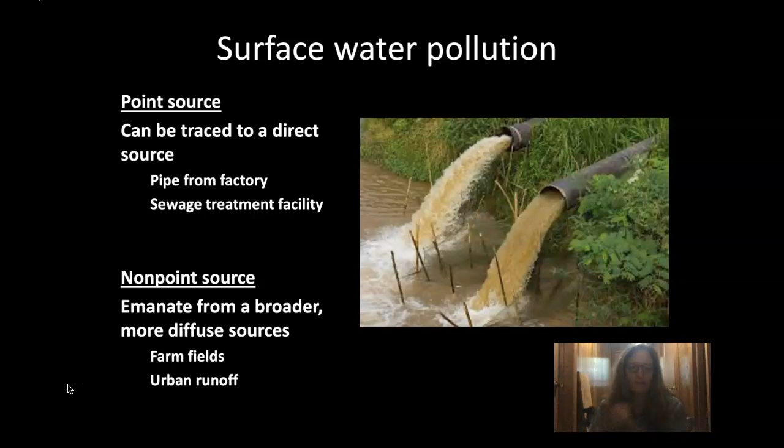A non-point source pollutant or pollution is a little bit more... it's harder to pinpoint the source. It could be a whole town. It could be just farming and agriculture in a community in a watershed. So it's a little bit more of a diffuse source, harder to pinpoint the location. Urban runoff and farm pesticides, insecticides, fertilizer are examples of non-point source pollution.

The Clean Water Act was born the same year I was, and it was put in place to protect mostly rivers, but included other surface waters, smaller streams, lakes, wetlands. It did not protect, at that time in 1972, groundwater. It was just surface water. Then it was kind of vague with respect to what size of the bodies of water it protected.

So the legislature makes the Clean Water Act. Then the judicial branch of the government had to interpret that and make some conclusions, and that didn't always go so well.

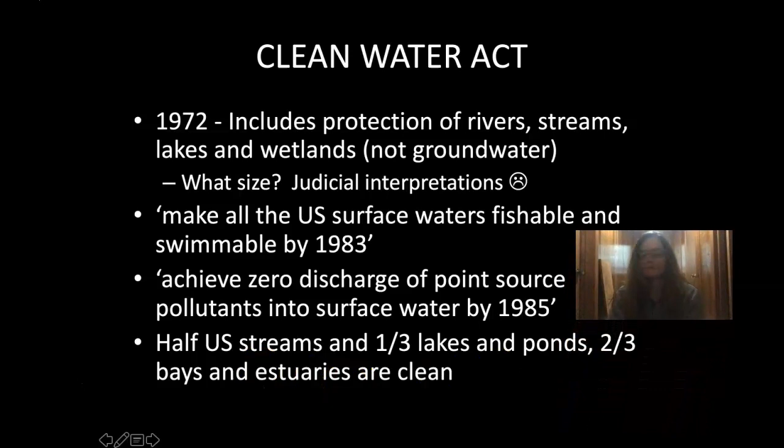The Clean Water Act said that it was going to make all U.S. surface waters fishable and swimmable by 1983, and achieve zero discharge of point source pollutants into surface water by 1985. Let's see, half of U.S. streams and a third of lakes and ponds and 2/3 of bays and estuaries are clean at this point. So it didn't really do exactly what they said it was going to do, but it's a really good start.

So before the Clean Water Act in 1972, I'm going to turn my face off here. Before the Clean Water Act, the streams were polluted so much that they could catch on fire. The most famous or infamous one would be the Cuyahoga River in Ohio, and it would literally catch on fire. The surface would, because of pollutants that were floating on the surface.

The world was polluted with DDT. There's a book, Rachel Carson's Silent Spring, that talks about the effect of DDT and other pesticides on birds, mostly on the viability of the embryos and the eggs, because the eggs would fall apart. We don't use DDT anymore. There was raw sewage, just literally poop, being pumped into streams and out onto beaches. It was pretty disgusting.

The Clean Water Act and then all the amendments added on it in the 80s were mostly controlling those point source pollutions. In order to do point source polluting, you have to have a permit. And with the permits, you can still do this. Basically it allows for pollution within certain limits, limits that would not totally degrade the ecosystem, but you can pollute some these days.

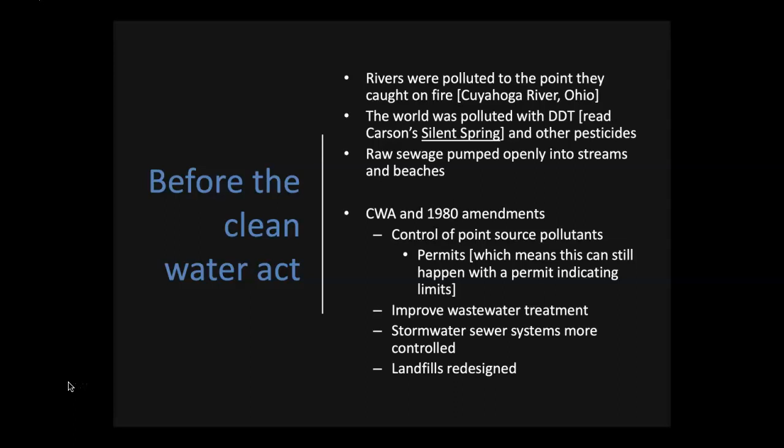Along with the Clean Water Act, there were major improvements with wastewater treatment, major improvements with stormwater and sewer runoff and controlling that, and then major redesigns of landfills. We basically went from open landfills to sanitary landfills where trash is now covered over top with soil and planted with grass, and at the base of it, there's a liner that catches the leachate running through the trash in the landfill.

Non-point source is way more difficult to deal with. We can look at it different ways. There's eroding stream banks, so in that way, soil is the pollution. Soil suspended in the water of a river is not a good thing. And so eroding stream banks, runoff from farms, animal feedlots are really gross. There's lots of poop and mud.

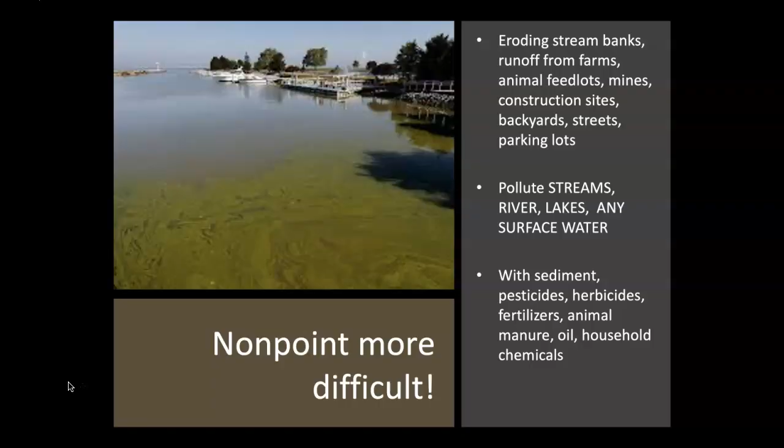How do we manage pollution in surface waters, then? The best thing to do is think about it as individual watersheds, and what are the pressures on an individual watershed. Some watersheds have agriculture, some don't. Some have industry, some don't. Some have neighborhoods, some don't. So it's really individual watershed parameters that will help you think about the best management practice for that watershed.

And then in turn, you'll protect the streams, the ecosystems, and the groundwater supply. So preventing that soil erosion, reducing runoff from agricultural fields, urban areas, and construction sites. Runoff is a big deal. You got to contain that stuff.

Limit the use of pesticides and fertilizers. This includes agriculture, from strawberries to GMO corn. Your lawn, golf courses, all have some kind of fertilizers or pesticides these days, unless they're obviously organically done. But even organic fertilizer is a fertilizer, right? So just containing the runoff is the important part there.

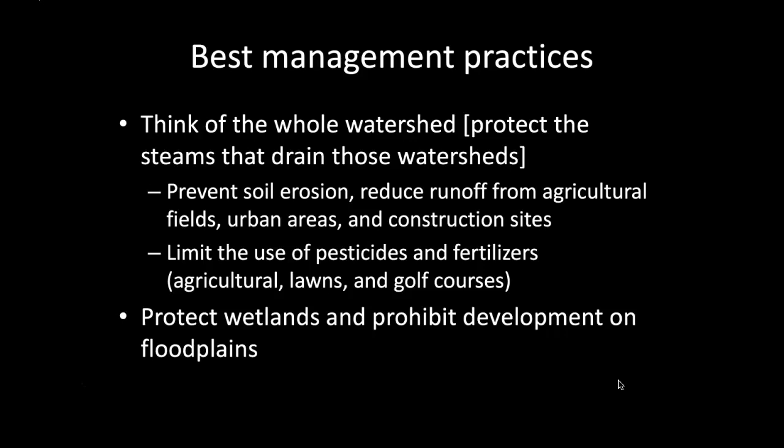Protect the wetlands and prohibit development on floodplains. So continuing to keep the health of the wetlands as an ecosystem and as a buffer against pollution is important. And then prohibiting the development on floodplains, whether it's just for safety or a land use management plan.

All right, what do we do? Methods of these best management practices. One thing you can do, and this is becoming way more popular, is to put in a rain garden. These rain gardens are low, usually little areas that are not a retention pond, but a detention pond. These are going to capture stormwater runoff, and they'll be on the edge of parking lots usually, or the edge of town, and they catch stormwater runoff from paved surfaces.

That catchment, the detention pond, not retention pond, catches the water and allows for the slow introduction of the water into a stream channel. The opposite of that would be to allow for direct piping of stormwater runoff straight into a stream channel. So we see a lot of that around Boone and in Boone Creek.

And the whole goal there is to mimic the pre-development conditions. Take urbanization and roll it back. Say, okay, if urbanization wasn't a thing in this location, what would the hydrologic cycle look like? There would be precipitation and infiltration and then recharge of the stream. When you take stormwater and you pipe it directly into a stream, you're skipping that infiltration step. So let's try to mimic that by putting in these rain gardens and allowing for that water to percolate, penetrate, infiltrate down into the groundwater supply.

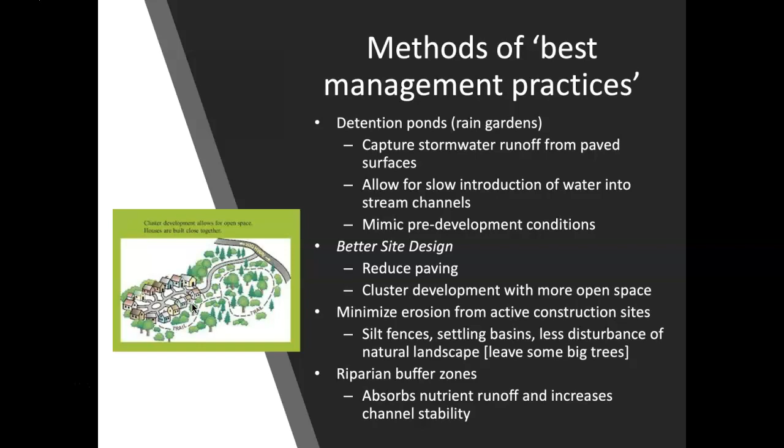All right. So I said earlier that with the Clean Water Act, there's still some pollution that is allowed. And the EPA requires states to identify the polluted rivers. States then individually are supposed to govern the pollution in their states. The EPA just can't govern all of that and shouldn't really. So the states come up with a plan. The states set the limits. The states require anyone who is going to pollute the watershed to have a plan, and then also a monitoring system. Okay.

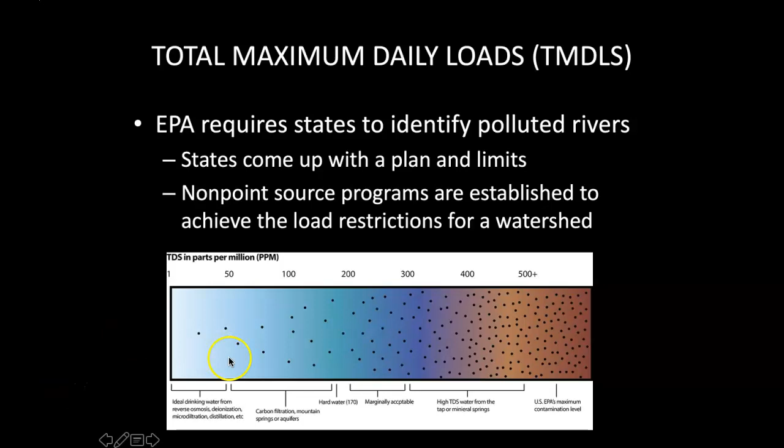Then we go over to the right, we get to an EPA maximum, 500 plus TDS for the dissolved solids. So in the middle is the marginally acceptable, and sometimes that's acceptable. Sometimes that will be the level that a state says, okay, you can have this marginally acceptable pollution amount, total dissolved solids, in the stream. Maybe as long as it's not used for drinking water.

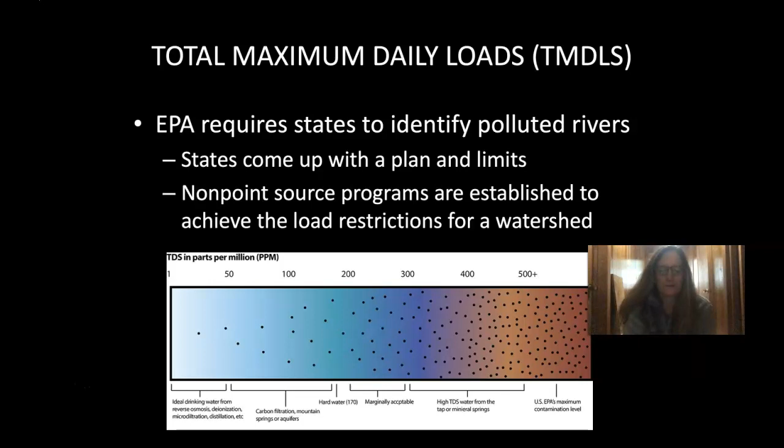These days, there are new threats to drinking water, and you'll hear about these in the news. These become quite oddly political. Why is it political to try to protect the environment? I don't know. But here's two big ones. Mountaintop removal, and this is a very important conversation in Southwest Virginia, Eastern Kentucky, and most of West Virginia.

And this is the idea that you can take a mountain, and it has a seam of coal in it. We'll call my pinkies the coal. And in the olden days, they would dig down and get this seam of coal. Now they can just blast the mountain off, right? So flatten it, make it a plateau, and get the coal out pretty easily. The problem with that is all of this material up here has to go somewhere. So oftentimes it's put into streams. Just fill up the valley with that sediment.

And this has been one of those problems with the Clean Water Act, and that's what size stream is protected. So when you hear about legislation going back and forth with mountaintop removal, it's usually about that valley fill. Where can they put the mountain that they removed?

Then you've got settling ponds that are these dirty ponds. They're big, they're full of sediment and exposed minerals, and the water becomes acidic. And so with those settling ponds, the dams need to be really well built, and they're up in the hollers all around these mountains. A lot goes into making sure those are safe.

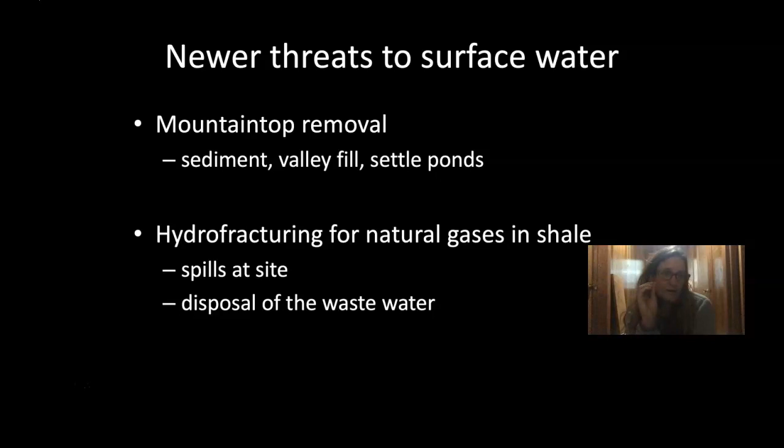So disposing that wastewater has become a concern, because it's basically polluted water. It's dirty water. It can also pick up radioactive ions when it's down there doing that fracturing, and then there are spills at the site. So the site, essentially the drilling platform, has to be really well maintained.

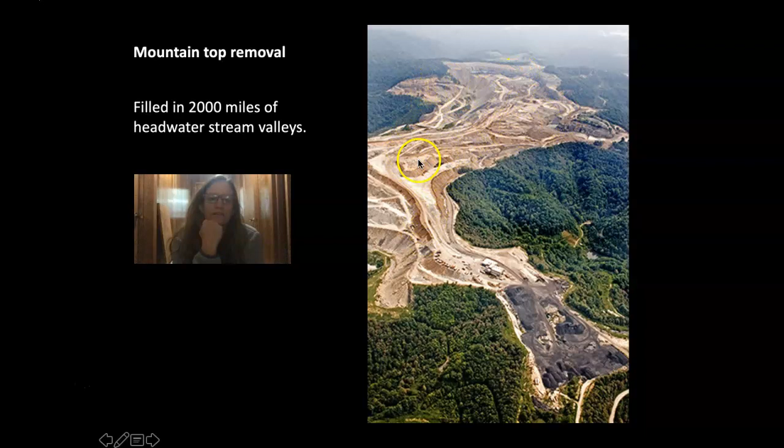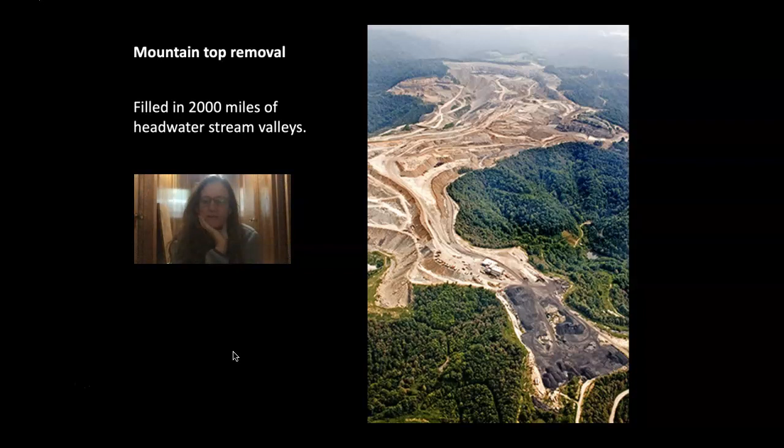Okay. Here's what mountaintop removal looks like, and this is the ugly part of it. So we've removed the mountain, and now that fill that was that mountain is going to be put down into the valleys. They filled in 2000 miles of headwater stream valleys so far in the southwestern United States. Here's an image of hydrofracturing.

Okay, let me turn my face off again, get it out of the way.

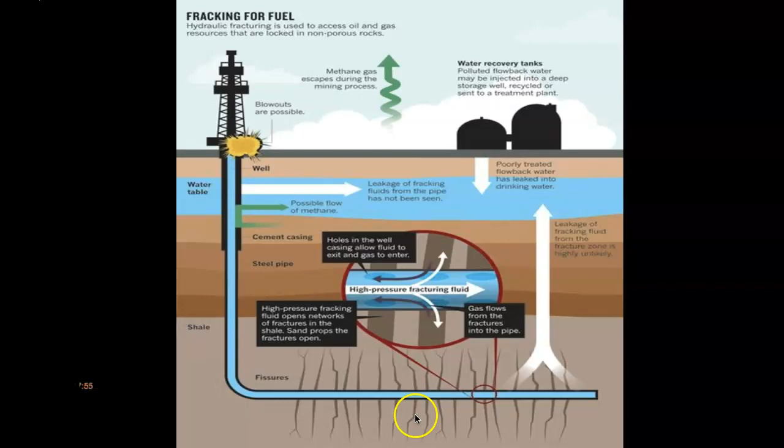Here's the drill site and the drilling. Again, here it goes sideways, and then high pressure hot water blasts these cracks into the shaly unit here, and that's going to release that natural gas. High pressure fracturing fluid opens networks of fractures in the shale. That fluid is going to have sand mixed in with it, and the sand is going to fill in those little cracks and keep them open. Gas flows from the fractures into the pipe. Yep. So you can look at that and see there are different possible pathways for pollution from fracturing.